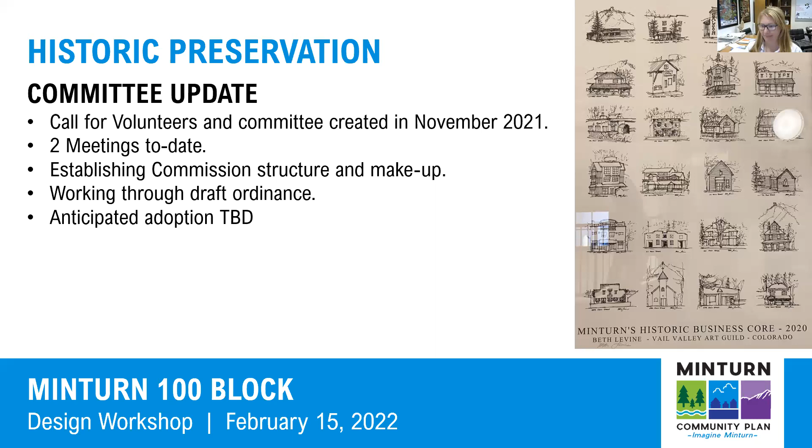And again, think 20, 30 years out, right? This is part of the community plan, which is typically a vision of 20 plus years. And so we want you to have your long-term lens on when thinking through these critical issues. We'll take a break a little over halfway through, and then we'll come back and do more of the public side, so site design and public realm aspects and parking. And then we'll end with questions and discussion.

So as I'm sure many of you are well aware, there's been a lot of activity in Minturn, just a lot of studies happening. And so the sentiment and the direction that we've got from the town is that they need real regulations in place. There's been enough studies done now that they want real direction. And so that's really what we're here for today, is to have lots of participation. We're so excited to see this many of you participating, and it means a lot to the community. And so following this workshop, we will go into drafting some regulations and design guidelines for the 100 block.

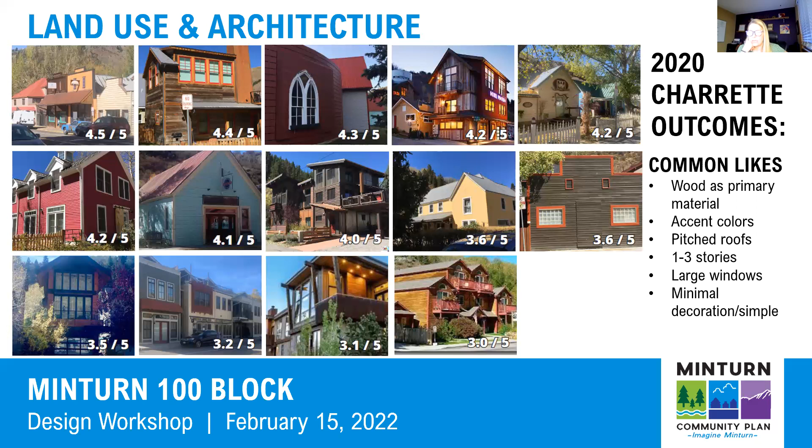So here on this slide is a picture of one of the things in the 2020 charrette that that group did, what we call a visual preference survey. And so they took a lot of photos of buildings in Minturn and they asked, how well does this building represent Minturn? And these were the results. These were the most liked by the participants of that workshop, or the ones that they thought represented Minturn the best. And so common likes, commonalities here that we see are wood as a primary material, some accent colors, pitched roofs, everything's 1 to 3 stories, large windows, and minimal decoration.

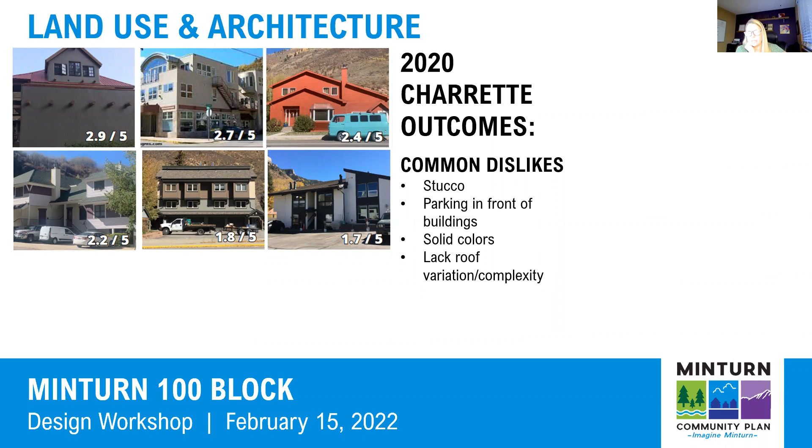So the question here, we want to pause and again see, are we on the same page? So on a scale of 1 to 5, how well do you agree with these values? 1 being strongly agree and 5 being strongly disagree. And we just want to see, of attendance tonight, do you still agree with these characteristics, these vision elements? Okay, we're at about 50%. We're at about 75% now. I'll give you all about 10 more seconds and I'll close it.

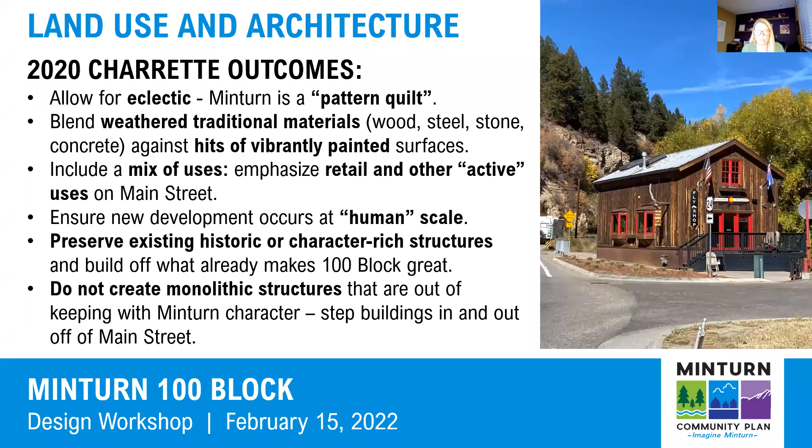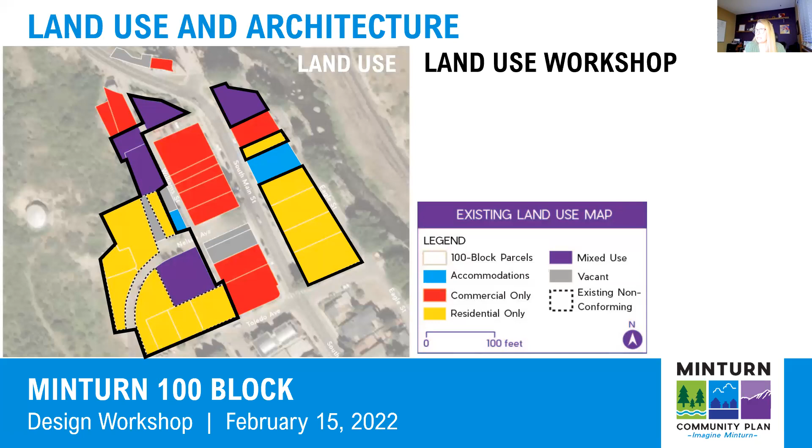And so some of the pros to this approach is that you are mandating tax revenue uses on the ground floor. So you're getting those commercial uses and the tax benefit. Active street life: by requiring commercial uses, you're hopefully getting more active uses on the street and sidewalk. The trade-off is that residential that may want to be located down in the 100 block would be pushed to other parts of town. Without much residential in a downtown, it can feel not as lively, and businesses could potentially suffer from not having those full-time residents within walking distance.

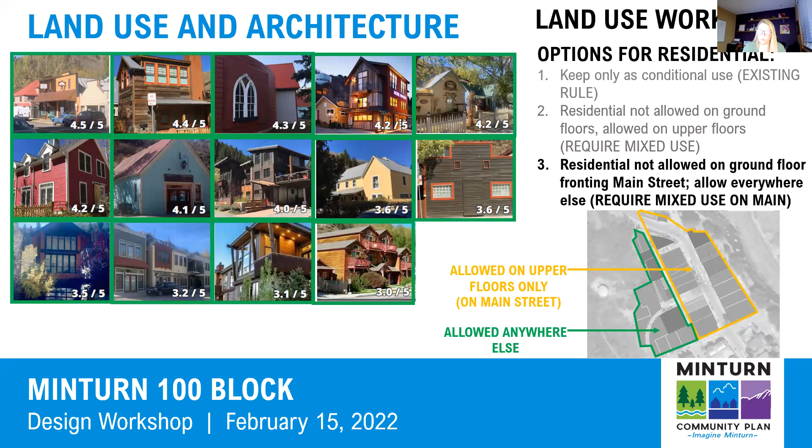And so we just want to understand what your vision is for the future of the 100 block. Do you envision future residents there? And if so, where should they be located? I want to also point out that both of these last scenarios would not preclude a full commercial structure from being built either. So we have three options here.

The first one is keep the rule as it is, where residential is a conditional use and only on the second floor. That's what the existing regulations say. The second option would be residential is not allowed on the ground floors, but allowed on upper floors everywhere in the 100 block. And the third option here on the screen is residential is not allowed on the ground floor fronting Main Street, but it is allowed everywhere else in green.

So we have another poll to enter, and take your time. I know this can be a little confusing, and hopefully we spelled it out enough for you to understand and be able to make an educated choice. We really want to understand if residential should be allowed, and if so, where.

Janie, I think we have a question that I want to make sure we have a nuanced answer to. Krista Driscoll just asked, would these options have any impact on current residential structures? And Michelle answered that current residential would be grandfathered in, but the real answer is that it would really only be grandfathered in to a certain extent. No one's going to come knock on anybody's door and say, the code changed, you can't have a single family home or residence here.

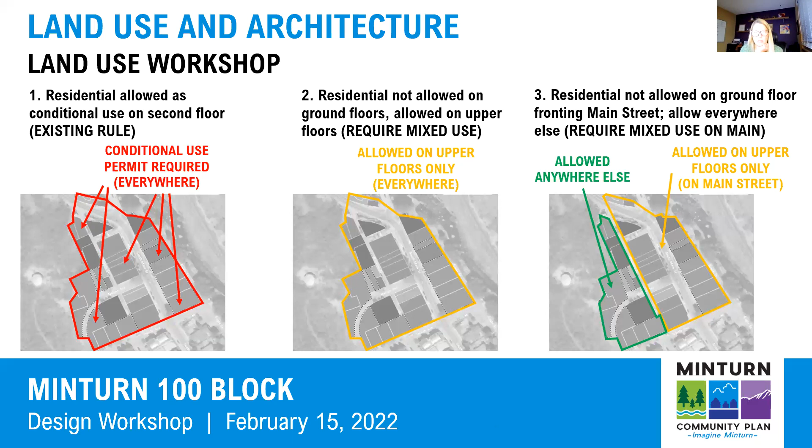Okay, so we're gonna move on now and go into building height. And so this is where we'll spend the majority of our time tonight. We're doing great on time, and I wanted to be sure that we had plenty of time to address this issue, so we should be good. This is gonna take a lot to set up. I'm gonna go through a couple slides, and then I'm gonna switch over to a 3D model of the 100 block where we can fly around and look at some different scenarios, and it should be pretty fun to see and explore.

So this map here is existing height, and so everything in yellow is a 1-story structure. Everything in blue is 1.5 to 2 stories, or 17 to 27 feet generally. And then everything in red is more of those taller 2 or 3-story structures, greater than 28 feet to the midpoint of the roof. Everything with the black dashed lines going through it is a pitched roof. So that's important to understand, that the large majority of structures in the 100 block are pitched roof structures.

And what I mean by half stories, this can be confusing, but basically this is showing a 1.5 story and this is a 2.5 story. What that means is the half story is tucked into the roof structure. So it doesn't have a full footprint of the bottom floor, but you can fit some program into that roof, so we call those half stories. So this is a 1.5 story. This would be an example of a 2.5 story that you might have some program up there.

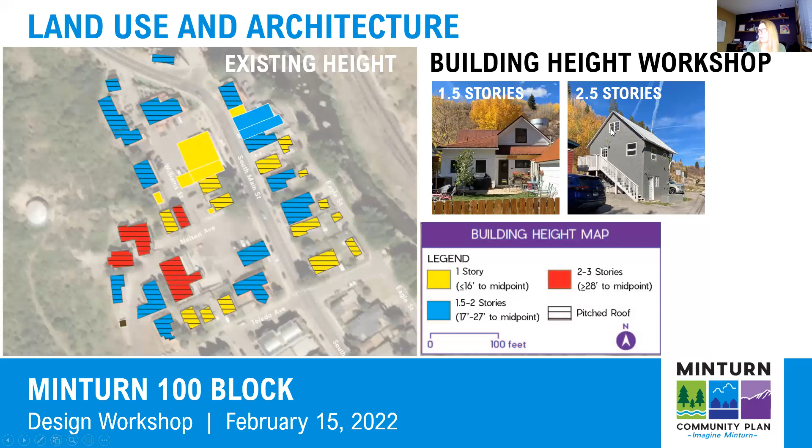Let's see, next slide. So this is what the allowed height is under existing code. Everything in blue, so every property that touches Main Street, has a 28-foot height limit. That is 28 feet to the maximum point for a flat roof. But for a pitched roof, height is measured to the midpoint of that roof, from the point to the very top. So this is what we mean by that half structure. 28 feet is a little low for a 2.5 story building, but it's not impossible. But if you're doing a flat roof, you only get the maximum of 28.

The thing that I think this way of measuring the height does is it incentivizes pitched roofs, because you can go a little bit taller. Whether that is desired to continue or not, I'm not sure. We'll work through that. But just wanted you to understand how that height is measured.

On the red, so everything kind of west of Williams and along Nelson is allowed to go up to 35 feet under existing regulations. That's typically more of a 3-story structure. Perhaps a 3.5 story, you might get some program up there. If it's a residential only use, so if you do go through the conditional use permit, it has to follow residential standards, and then it falls back down to 28 feet. So it can be confusing, but under existing rules by right, you can't do residential. So we wanted to show, this really is the by right scenario. If you're going to build a building in that red zone, you can go to 35 feet.

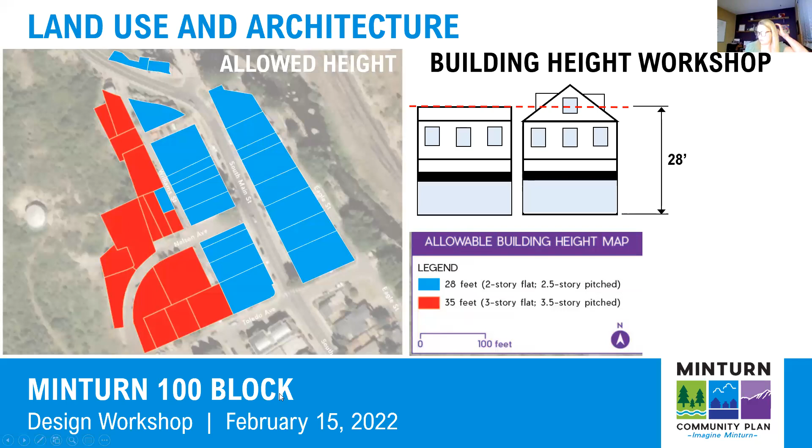Okay, so we're going to transition into a SketchUp model, and just somebody nod your head or verbally tell me, can you now see my other screen? Yes. Okay, awesome. Okay, so we are going to fly through the 100 block and look at a few different scenarios. I'm going to set this up and go through this in order. We're gonna look at some conditions along Main Street. We're going to look at some conditions along Williams Street and some along Eagle River.

I wanted to start here kind of in plan view. You can see the area of downtown. You can see building footprints, where parking is, the road, Main Street coming through. Here's the river, just to orient you, and north is up. So when we talk about heights, and especially in these quaint mountain communities, sun access is important. So I just want to show everyone, I'll turn on shadows here.

We're looking at equinox. So this is an average sun condition. Of course, in the winter, it'll be a little bit shadier because the sun is lower. In the summer, it will be a better case scenario, less shade from buildings because the sun is higher. So we're looking at an average condition.

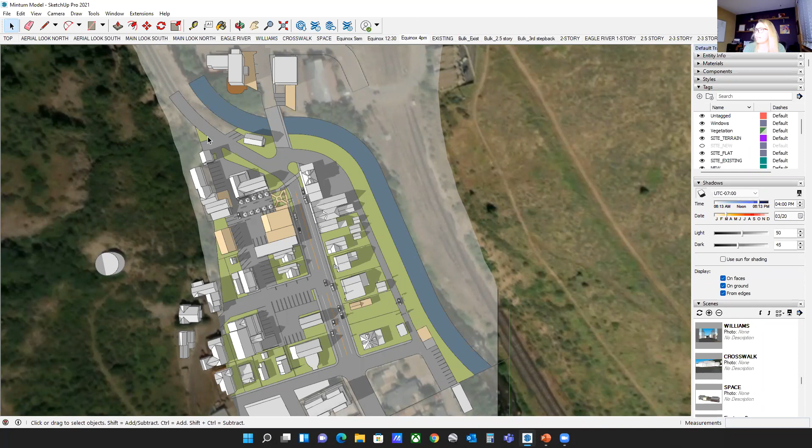Okay, so we're just gonna fly around, as I said here. I want to start by looking at this aerial view. You can see I've picked 3 sites in beige that are going to be our test sites for today. And we're going to look at some different scenarios for, if those properties did redevelop under existing regulations, this is what could be built. And then we'll look at some options.

Just full disclosure, these are for testing purposes only. I haven't consulted the property owners. I'm not working for them. I'm not a developer. These are simply to test different scenarios of a couple different Main Street fronting properties. One that would go to Williams Street here, so Minturn Country Club. One that would go from Main Street to Eagle River. And then one along Williams, because they have different rules.

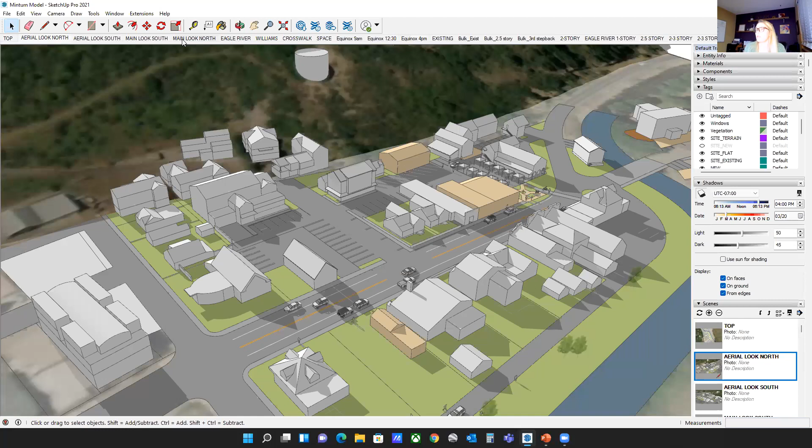So first, we're going to go over here to Minturn Country Club and look at pedestrian level. So this is standing on the street. This is what the massing looks like today. So it's a 1-story structure, maybe 16 to 18 feet tall. And you'll notice that these properties on the northern side of Main Street are a little different in that they come all the way up to the sidewalk. So you can see those buildings, and I'm sure you are aware there's a pretty tight sidewalk space to walk there. But they do feel a little different than the further you get down to the south.

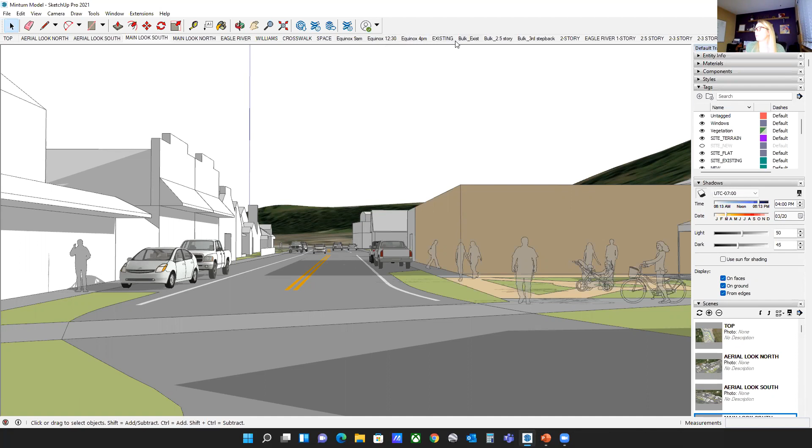So let me look here. This is the current sort of regulations. This is the imaginary box that if you were to redevelop, this is what you could build to today. So this is showing that 28-foot height limit. So this is the maximum 28 feet. If you are a flat roof structure, you can just put that box there.

If it's a pitched roof, there is a bulk plane that sets in. And then again, there is that rule that the 28-foot height is measured to the midpoint of the roof. So you could actually go a little bit taller if you are a pitched roof structure. But generally, this is that imaginary box that those regulations set. So you can kind of feel what that feels like.

I'm just going to walk through a couple other scenarios. So 28 feet is a decent 2-story structure in a condition like this, in a more urban condition of a downtown.

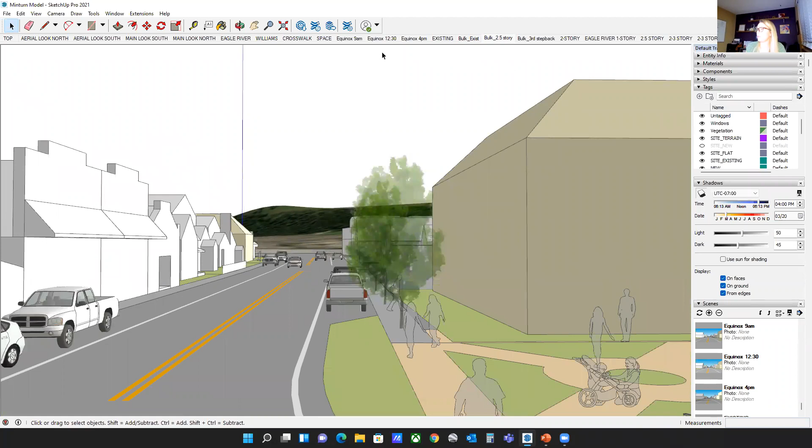Another way to do that is to use the bulk plane, but do it on all sides. So this is just showing you a different scenario of that imaginary box. So you might set a max dimension and then have the bulk plane go up from there. This raises that dimension, instead of 20 feet, which is more of a 1-story before the bulk plane sets in, this would be allowing more of a 2-story frontage, which is what these feel like.

And bulk planes can be a little interesting to administer. They're used a lot in zoning codes, so they certainly are not new. They're meant to kind of step back the massing and allow sun access in. But just showing some other ways that can be done is looking at massing and setting some different dimensions for this scenario.

Maybe there's a scenario where on Main Street you allow a certain dimension to be closer to the street, whereas a certain dimension has to be further back to allow for those patio spaces. We'll talk through this. Should buildings, new construction, be able to go up to 3 stories or not on Main Street? We'll walk through those scenarios, but if so, maybe it should be set back up there.

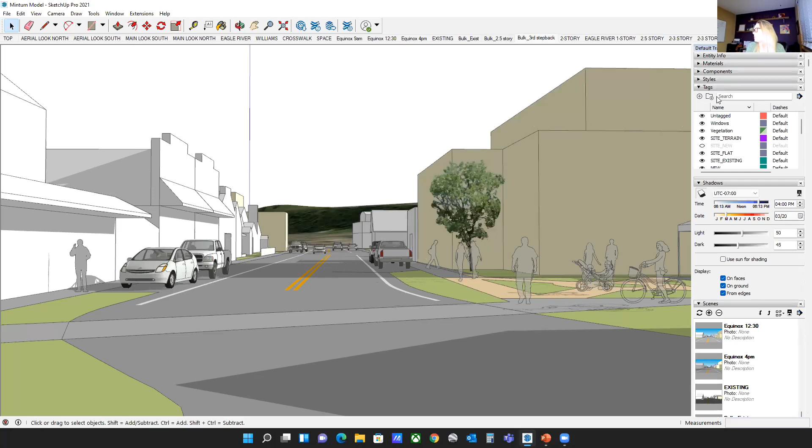You can see from different views. Turn off the shadows here for a second. If I move the camera up a little bit, we want to make sure that, even if you do step that back, it still feels like a 2-story structure on Main Street. So I just wanted to present some of these imaginary boxes. This is essentially the dimensions that will go into a code. But I know that can be hard to imagine in your mind.

So I'm going to offer some architecture. I ask you to keep an open mind. I did not design these buildings. You might not like the style, but really just pay attention to the scale that they provide. So back to existing conditions. This is the existing bulk plane and allowance today. And what that might translate to, we can look at this condition where it's a typical 2-story Main Street traditional storefront building. So that could be built under today's regulations.

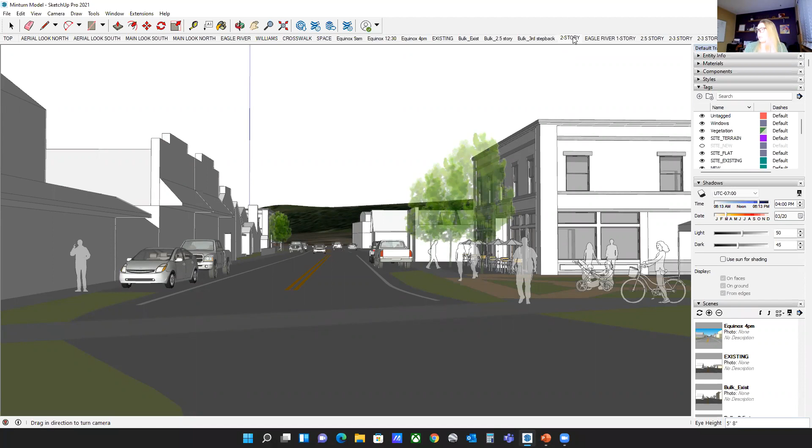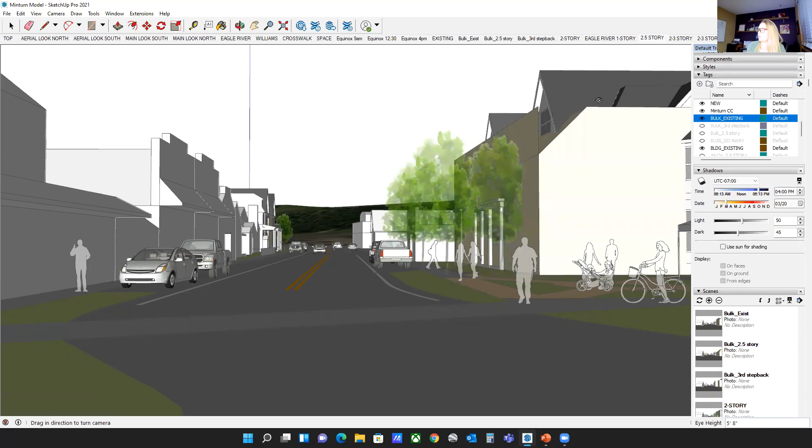Another option is a 2.5 story. So how does this feel compared to that 2-story building? Is this something that might be appropriate in downtown, having that 1/2 story tucked into the roof? So with the existing bulk plane, I can turn that on top of this. This could almost be built. You can see that bulk plane would make that top gable go back further. But again, these are the things that we want to test and then reverse engineer what's appropriate. So I do want to present something like this to see how people react to it.

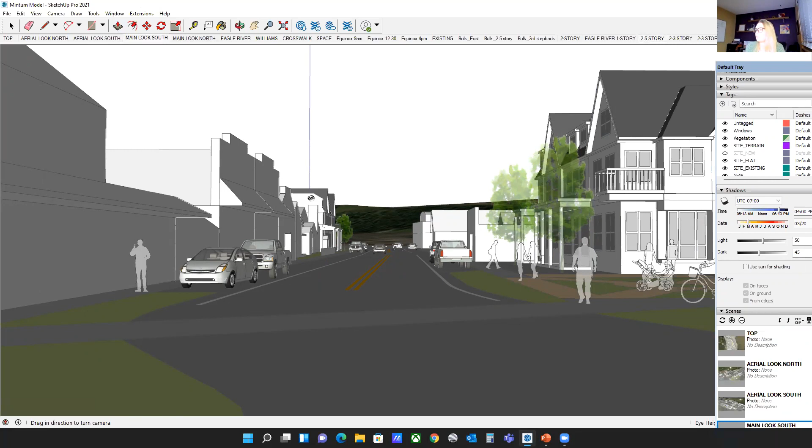There might be another option where, so this is that 2.5 story. Another option would be a 2-story in front where perhaps it could go back to 3 stories along Williams. And so again, these are just some massing models that show architecture. Don't get too attached to the style. Not particularly in love with this one either, but could there be a scenario where there's 2 stories required in front, but it allows for the 3 stories in the rear, kind of the back half of the site?

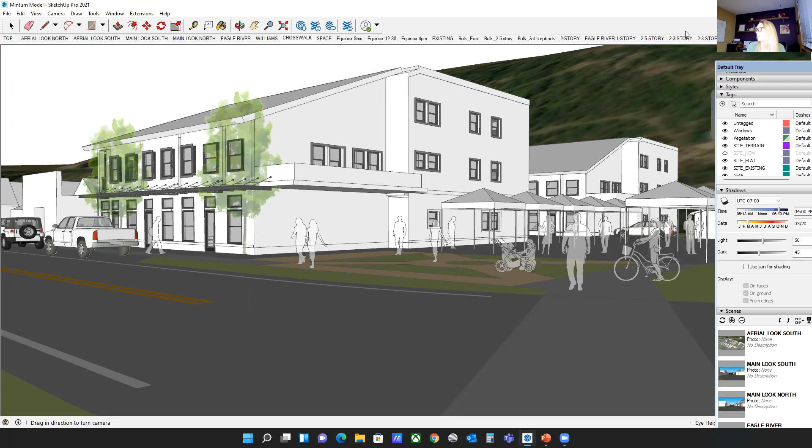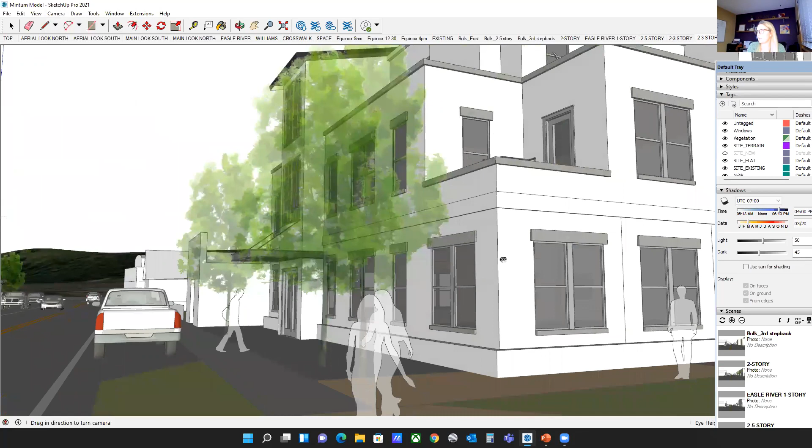Going back to this view where we want to compare. Another scenario might be more of that varied massing. So still regulating that 2-story feeling along Main Street, but allowing a 3rd floor more in a penthouse style that would be required to be stepped back. So that, from the street, let me place my person. From the street, if you're looking around, it feels like a 1- and 2-story building. You would have to look up to see that 3rd story.

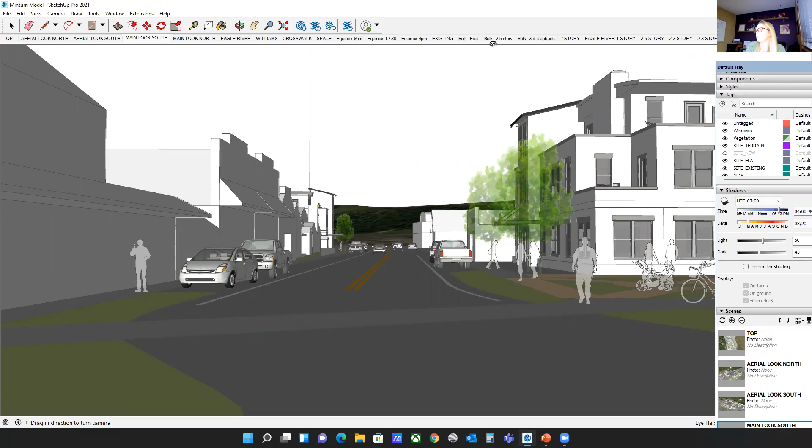So these are some options we're going to look at. We are going to go back and vote on them, but I just want to fly around and show everyone these different scenarios just to give you an idea of scale and massing, so that we can reverse engineer into some of the better regulations for the town. So this is sort of that gateway area at the corner as you enter Main Street there. Let's go now to look from the other side of Main Street.

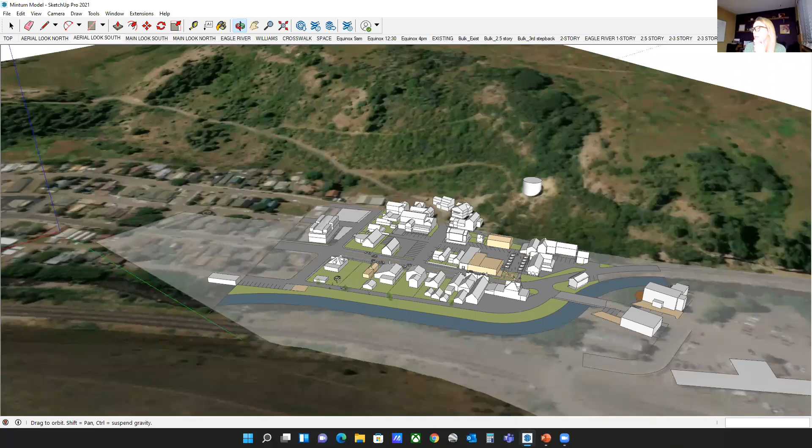So this is. Shani, can you pause to take a live question? I didn't know the answer to it. Yeah. There was a question about the shadowing in the model, were you able to take into account the topography of the hillsides where often the sun goes down behind those hills fairly early in the afternoon? Yes. So you can see, we do have the hillside modeled. Okay. So the topography is there, and so it does cast shadows appropriately. Great, thank you.

Okay, so we're gonna go to Main Street looking north. So this is existing conditions. This is that little shotgun house there today. So you can kind of see how these buildings feel today. And instead of going through the bulk planes, because we've already explained how that can all be regulated, we might look at bulk planes, we might look at step backs, we'll play around with the appropriate dimensions, but we really want to get gut reaction to what's appropriate on the street.

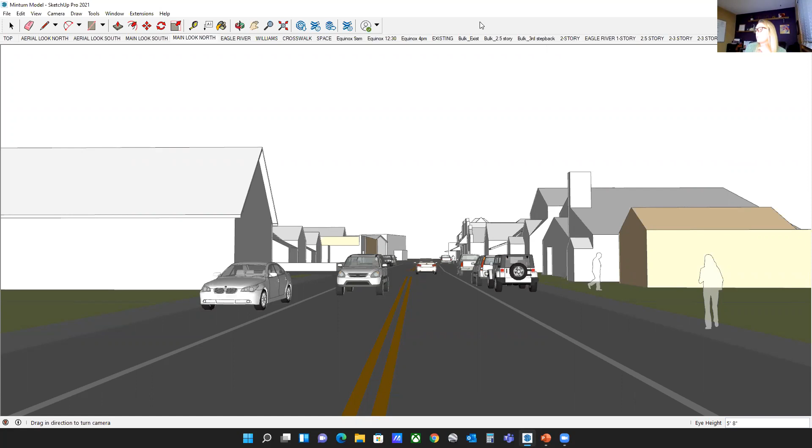So this is sort of a different condition. More of the residential structures here. So these buildings are set back from Main Street a little bit. And so let's just look at that 2-story condition. So this is sort of modeling what that same 2-story storefront might look like in the existing conditions today.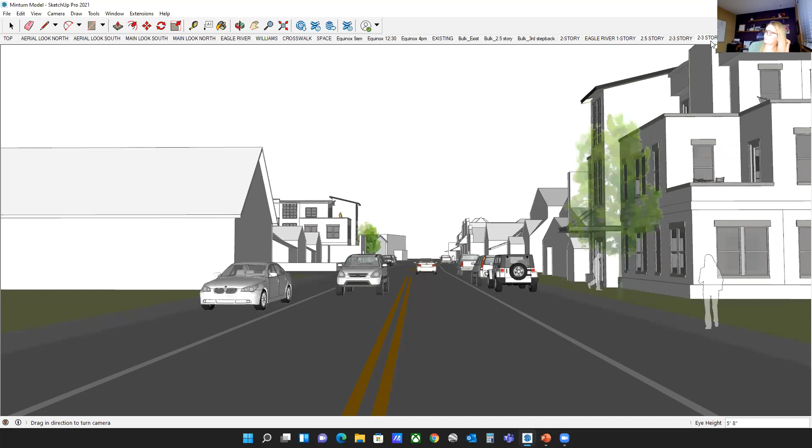Flat roof, just showing maybe a 2-story with a pitched roof. Here's that 2.5-story. And then finally that 2-story in front with a 3rd floor step back. And then the one that I actually forgot to look at is we also want to present a full 3-story option, just in the event that that is popular. This is what that scale would look like here.

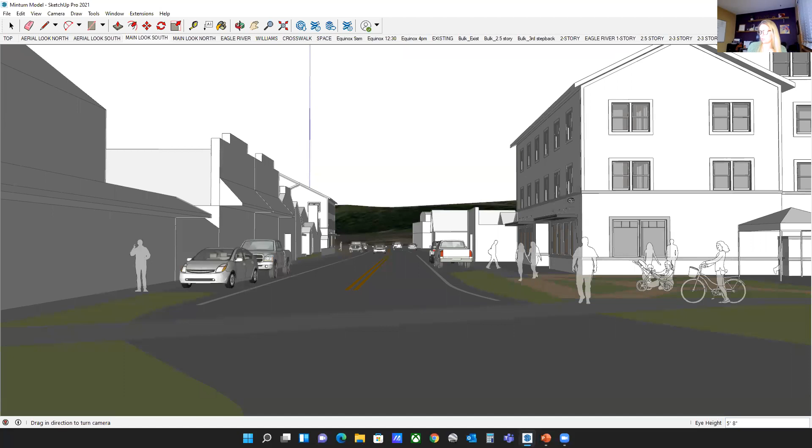And since I missed doing that on the other one, let me go back there and show you what full 3 stories would look like in existing condition context. So those are the scenarios for Main Street, what we're calling Main Street South. So I'll go through those one more time.

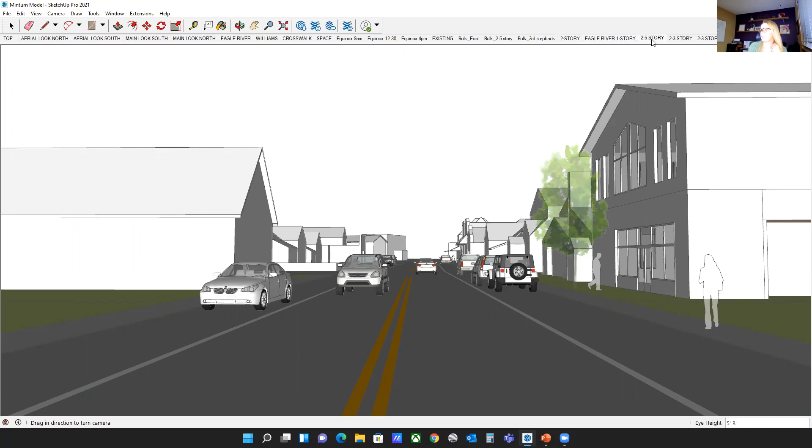Really allowing a maximum of 28 feet in that 2-story envelope, period. Maybe allowing for that extra height if it's a pitched roof, like the existing regulation says. Is there perhaps a desire to allow that half-story up there, or looking at the more 2- and 3-story massing and what that feels like. So again, we'll go back and look. I'll have pictures of these that you can remember and recall, and we can always go back to the model if we need to. So that's Main Street.

We wanted to look at that sort of northern segment condition as well as the southern segment condition, because they do feel a little bit different today. And so we want to think about those different contexts in terms of when we get into writing the regulation, should they be the same all along Main Street, or should they maybe differ? And so that's what the voting will tell us.

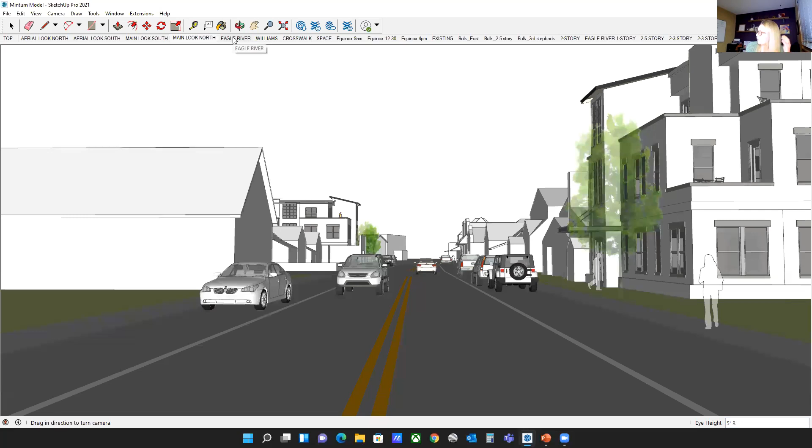While we're on this property, I'm going to go back to existing conditions and look at this property along Eagle River. So this is Riverside here in the green space, the one-way drive headed south, and you can kind of see the existing, these are all the more residential scale structures that line that area today.

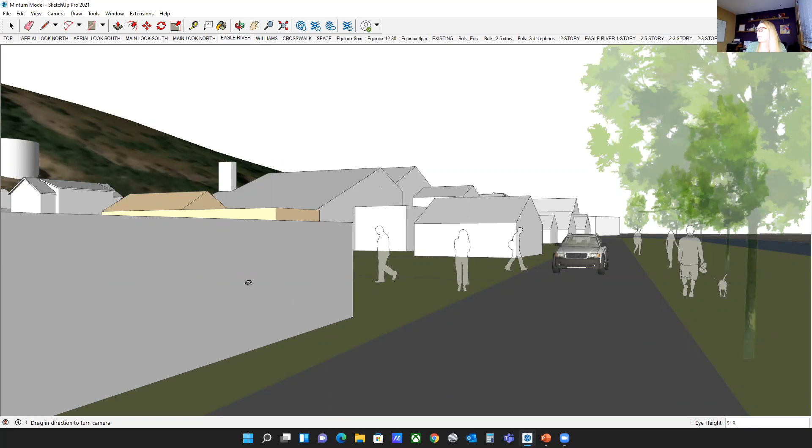Under existing regulations, this is that 28-foot box. And so turning that into architecture, this is sort of what could be built under existing regulations. Again, kind of that more 2-story structure there. We're going to present a couple options here. Again, just for mass and scale, looking at a 2.5-story structure and what that feels like along the street with these other structures.

Or perhaps I also wanted to present just another option here, knowing that the context is more of a 1-story atmosphere. So another option would be to look at some sort of regulation that says buildings can step up to 2 stories here, or 3 stories, but you really want to try to keep that 1-story frontage along Eagle River. If that's desired, that is something that could be written into the code.

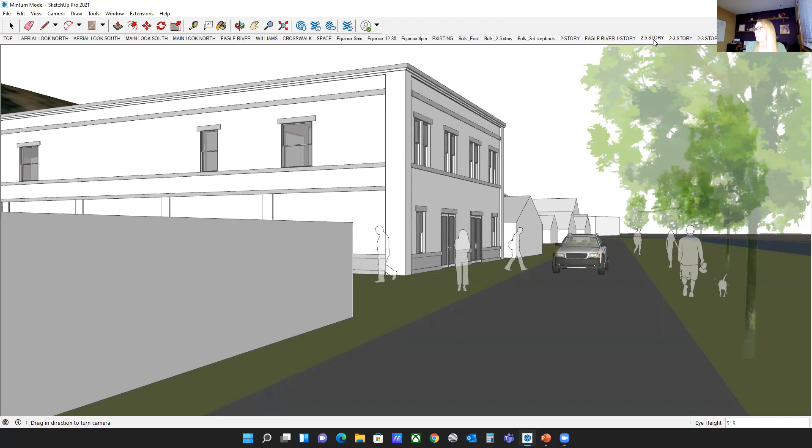So again, I'll go through those. This is massing that would be allowed. This would be almost allowed. It's a little too tall to fit in the box that you have today, or that 1 to 2 story step back. The other thing that this could do, which is cool, is provide maybe some roof decks overlooking the river.

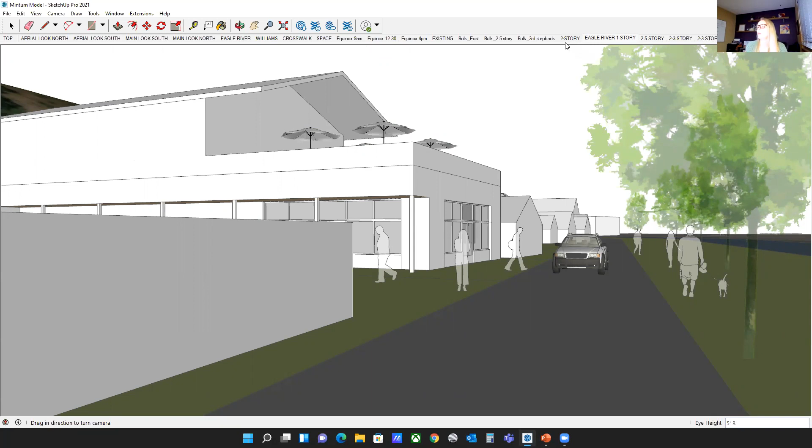Okay, moving along to our last condition here is Williams Street. So this is looking south along Williams. So you're coming in, it's a one-way going south. This is Hotel Minturn back here. This is a 2-story apartment structure. And we have some tents shown here for the Minturn market.

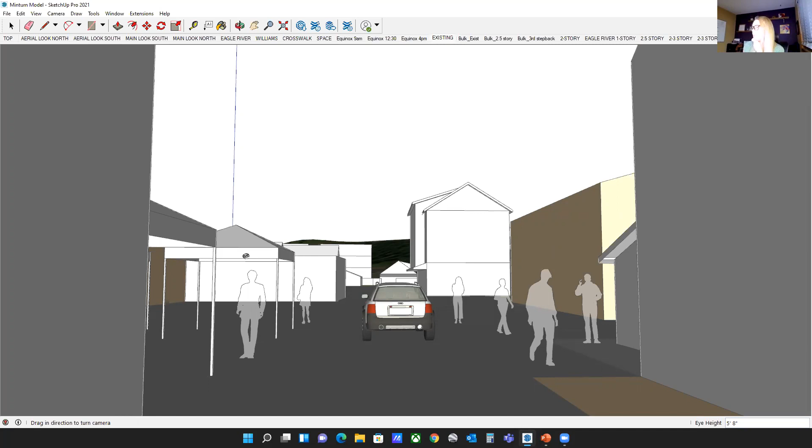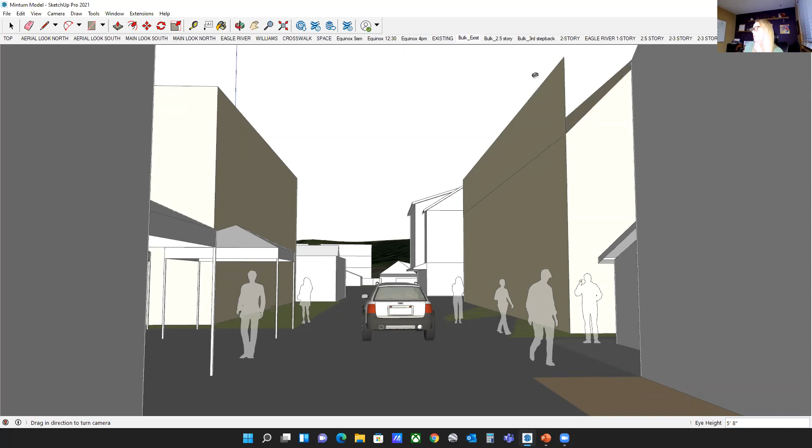So here, let's look at just showing existing bulk. Again, that 28-foot plane. If it's pitched, you can go up to that 35-foot dimension though. So it goes up a little bit higher, but the bulk plane still starts at 20. So it's a bit of a higher pitch. So again, let's just look at these conditions. So here is a 2-story condition and what that would feel like on Williams Street.

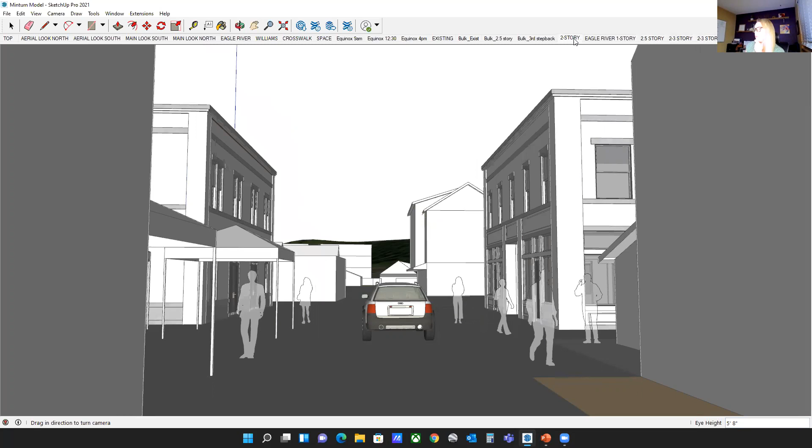Here's that 2.5-story condition along Williams. Skip that one. And then here is the 2 to 3-story massing and what that would feel like. And I think we did, yeah, full 3 stories. So 2-story enclosure, 2.5-story enclosure, and then that 2 to 3-story enclosure.

So again, we can flip through these, but these are the conditions that we want to get your votes on tonight. It's really important to look at these three conditions along Main Street, both north and south, along Williams, because in the 2020 charrette, it was expressed that people would really like to see more activity on Williams and have it be this cool pedestrian shared street with more active uses. And it's starting to get that with some of the uses happening back here today.

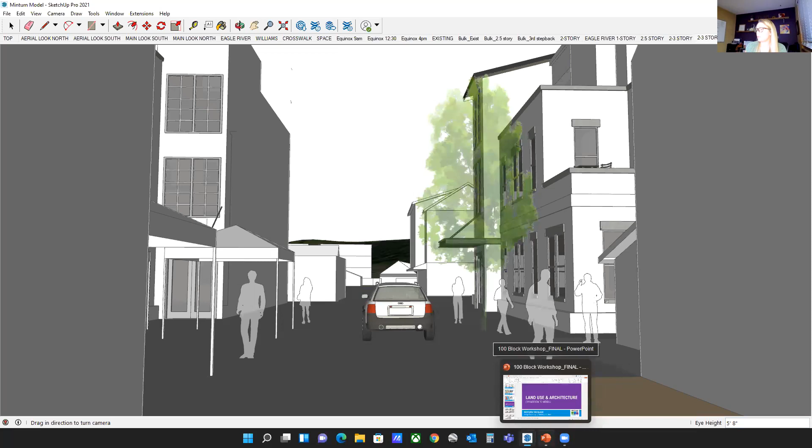Okay. So our first poll is looking at Main Street North. This is the first area that we went to, at the Minturn Country Club example. So we want to ask you to vote on these scenarios. Number 1 would say 2-story and 28 feet max. Draw a box and don't incentivize pitched roofs. Just put everything within that 28-foot box. It offers predictability, but it would be 2-story maximum.

Option 2 would be a slight modification of that. It would be sort of what you have today, but maybe playing with the dimensions to make more sense architecturally. So 2-story and 28 feet would be max for flat roofs, but pitched roofs might be able to go up to that 2.5-story typology that we showed. This would incentivize pitched roofs by allowing that extra height.

Option 3 would be 2-story max along Main Street, but in the back half of the site, you could go up to 3 stories along Williams. So you would step back that 3rd floor from Main Street quite a distance, at least 20 to 25 feet. Option 4 is looking at allowing up to 3 stories, but requiring that 3rd story to be stepped back on all sides. So instead of just stepping back on Main Street, even on the sides and along Williams, you would step back that third floor.

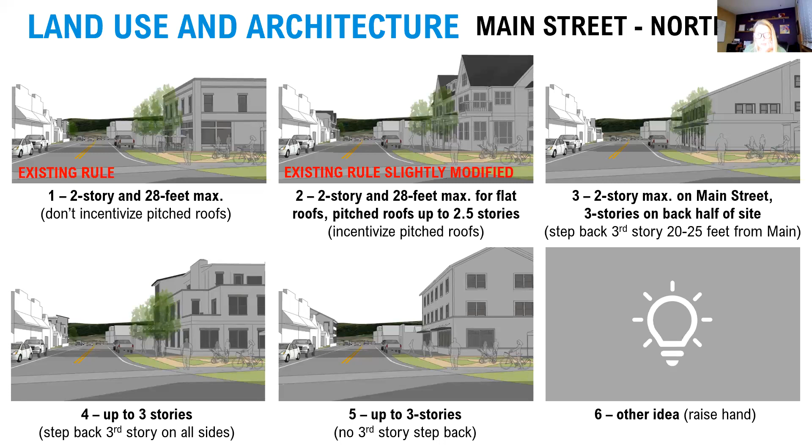Okay, let's move on. I'm going to change to the options for Main Street South, and so we just want to understand your vote might be the exact same. You might think that Main Street is Main Street and just make the rules the same. But in the event that you feel a little bit differently about South, just because the existing patterns are a little different, we want to know that.

So the options presented here on the screen are similar to the first one. Option 1 being just make that 28-foot box. Everything has to fit into it. Option 2 being 2-story and 28 max for a flat roof, but allow a little bit taller for pitched roofs to incentivize pitched roofs. Number 3 being allow up to 3 stories, but step back that third story on all sides. Or number 4, just allow up to 3 stories, or 5, other idea, raise your hand. So the gentleman that mentioned the 3 stories along Eagle River, that would be option 5.

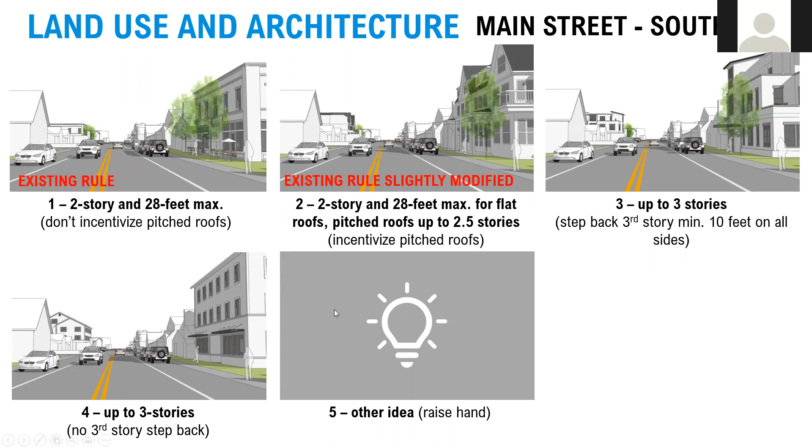So, Ken? Okay, great. So we've heard, let's ask, I'll ask you to unmute someone that we haven't heard from. So we've talked about the 3 stories there. We've talked about the parking concerns. Anyone have any other ideas for Eagle River that you want? I just want to make sure that everyone can be heard. So right now, the people with their hands raised, we have heard from before. If anybody else has anything, please feel free to raise your hand.

Okay, let me ask this another way. If your comment has already been touched on, if you could unraise your hand so that we can stay on time. If you have a brand new comment that hasn't been brought up, you can keep your hand raised and we will unmute you real quick. Also, you can always use the Q&A. So if you have a follow-up comment or a question to clarify, please pop it in there. Krista, you have the ability to unmute yourself.

So one of the things we love best about Minturn is that the river goes through it. We're definitely river people. I think that if you go too high back there, then you're kind of limiting that view or even what you can see of the river to people who can afford expensive redevelopment on that side of town. Okay. Ken?

Hi, can you hear me? Yes. Regarding the riverfront, I think it's an untapped resource. I always thought that we could have food truck Fridays there all summer. We have to get people over there. I'm not commenting on the height that should be over there, but we need to utilize that space. Al fresco dining in the evenings all summer long, food trucks. I think we can really revitalize the town using the riverfront, like many other towns have done. Thank you. Okay, Kelly?

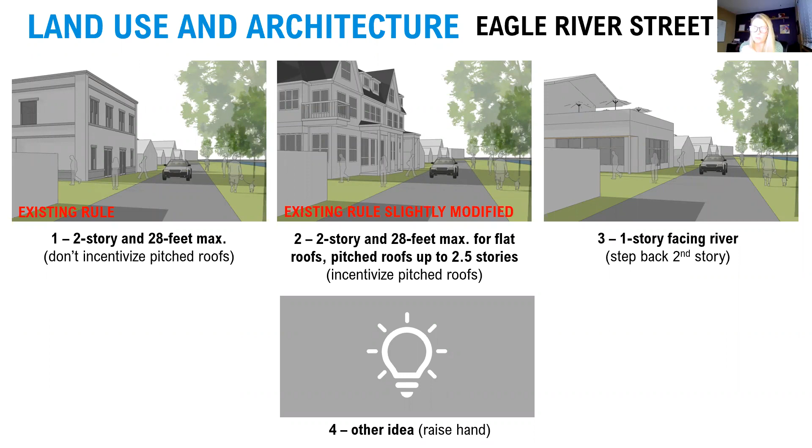Okay, we're at 56%. Scott, do you want to answer the food truck question while people are answering the poll? Sure. Good evening, everybody. The town just adopted food truck regulations this last year. So the question was, are there any restrictions in place that limits that? And there are. So good question. Thank you. Okay. Have about 82% participation. I'll give everybody about 10 more seconds.

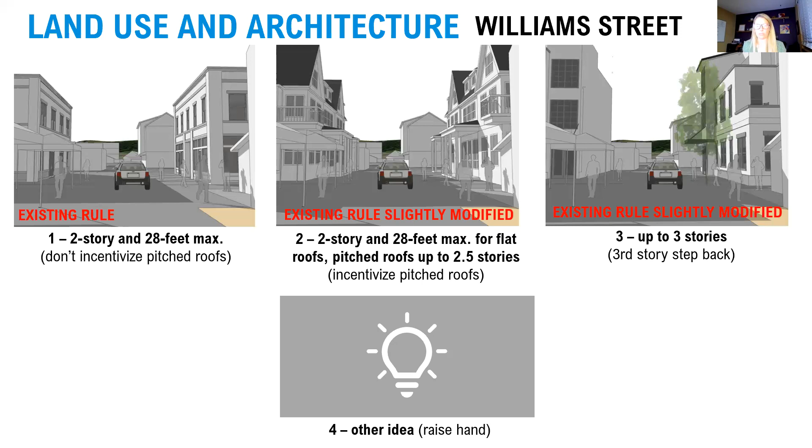Thank you, Madison. Okay, so the next 45 minutes, we're going to go through site design aspects of regulations. So talking about setbacks and lot coverage, more fun stuff, and then parking, the really fun stuff last. So stay with us hopefully for another 45 minutes, and then we'll get you out of here on time. For site design, I'm going to hand it off to my colleague Ellie, who's going to walk us through some of the site design stuff. So Ellie.

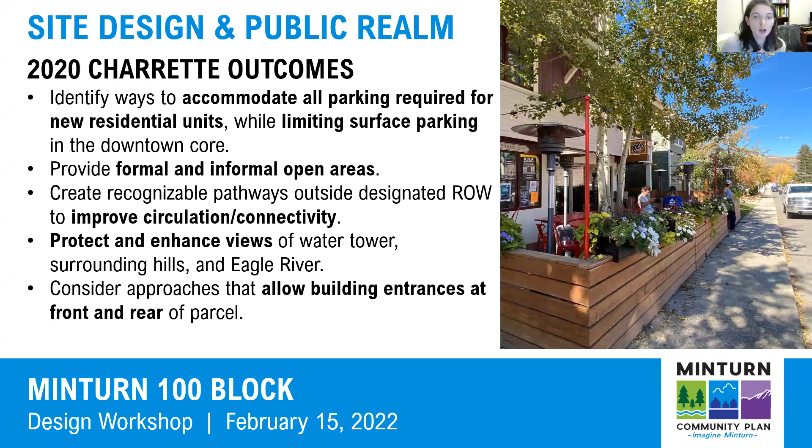Great, thanks, Janie. Do you want to start sharing your screen? Or do you want me to share? Nope, I thought I did. Thank you. Okay. Can you see the screen now? Yes. Okay. Weird, it's not showing. Oh, there we go. Oh, apparently my internet connection's unstable. That's great.

Next slide. And these were some of the other outcomes we heard. This has been talked about already a little bit tonight: having more connections to the river, having buildings that go in and out along Main Street, so not having one set setback but having some variation in the facades there. And then creating more opportunities for landscaping, courtyards, and cafe seating, so figuring out where some of those green spaces can come in.

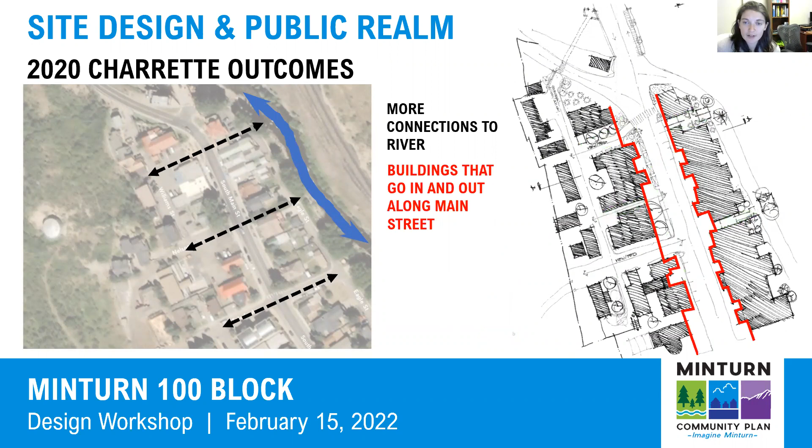And so now there'll be a poll that asks you for your level of agreement with what you just heard. If you fully agree, it'll be 1, and don't agree is 5. And if there are some things you want to provide comments on related to that, please either raise your hand or we can start with putting them into the Q&A and see where we go based on the poll results.

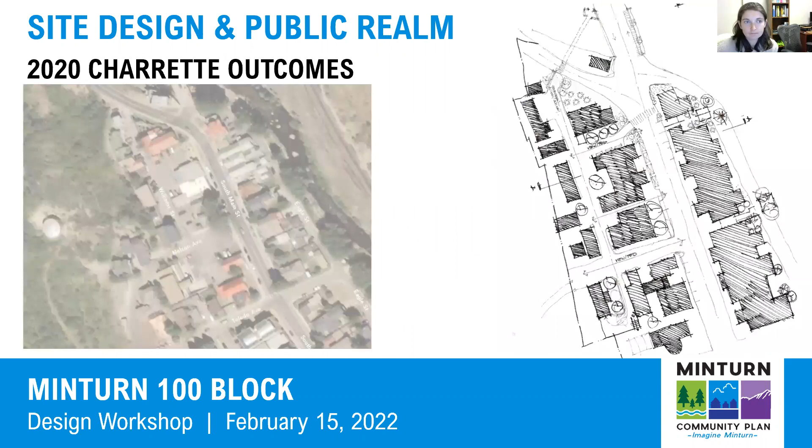Okay, so now we're going to be looking at existing site design and how buildings are laid out relative to what's actually allowed. And then we can figure out how do we work with that. So in terms of lot size, the minimum in the 100 block is 2,500 square feet. The maximum is 7,500 square feet. So what does that mean? That means that if you have a lot that is smaller than 2,500 square feet, to redevelop it you would need to put multiple lots together. And if it's more than 7,500 square feet, you would need to divide it.

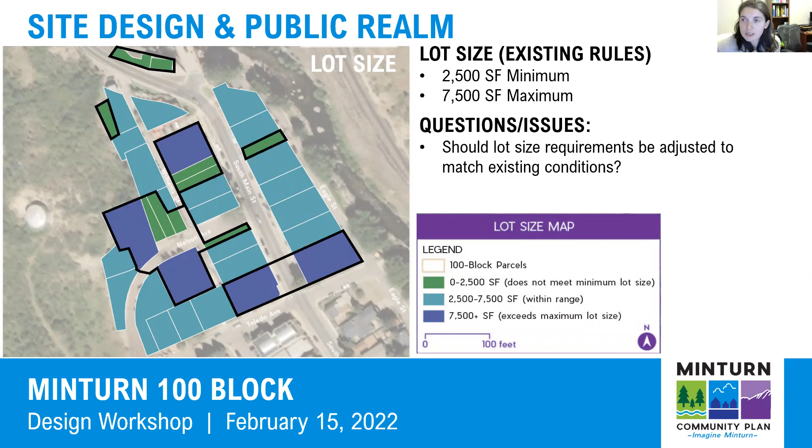And so these areas that Cheney is marking in that black line are those lots in the green or dark blue. And this analysis isn't perfect. This is based on GIS data, but it gives us a relative sense. Do we have a poll on this one? No, we don't. Okay. So we'll just move on to the next one, but if you have any comments about that, please put them into the Q&A.

So required setbacks. For any lot in the 100 block, you're required to have 10 feet from the front, so that's from the parcel line, 5 feet on either side, and then 30 feet from live streams. So as you can see, there's a lot of buildings that are coming against that. That dark gray area is really the allowable building footprint based on those setbacks. And so some of those areas outlined in red are where buildings are not in keeping with that. Prime examples of that are the buildings that go right up to the sidewalk, or the buildings that are next to each other. And we see a lot of those in that northern portion of the 100 block.

And so the poll question we have here is, Cheney has drawn this black line of where we see a lot of that existing, and how should we differentiate or not differentiate in terms of what's allowed. So potentially making changes to allow buildings to come up to the sidewalk, or to not have any space between them. So the question is, should setbacks north of Nelson in that black outlined area be allowed to be smaller given the existing context of buildings that are closer together? You can answer yes, properties north of Nelson should be allowed to be closer together, or no, all properties should be treated equally.

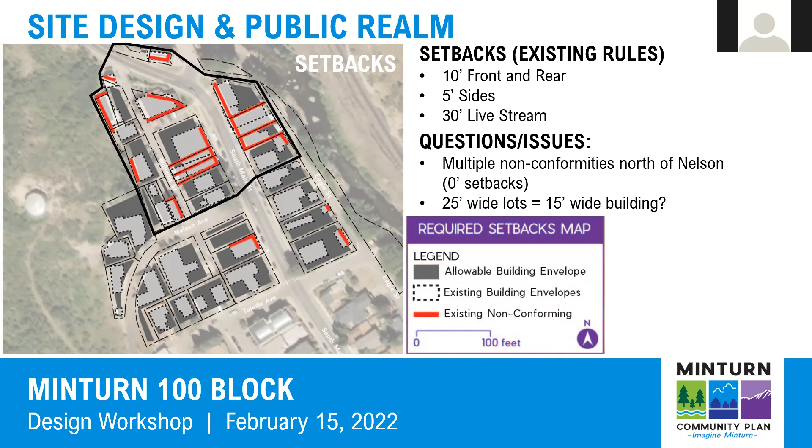Great. So the next element we're going to talk about is lot coverage. Right now, what's allowed in the 100 block is up to 80% lot coverage. There's only 2 parcels where that is occurring, these 2 that are in the dark. And there's actually a fair bit of variability, as you can see by all the different shades of pink we have here. But similar to the last question, we want to ask, for this area north of Nelson, does it make sense to allow a higher lot coverage there and a lower lot coverage elsewhere? And we're not necessarily sticking to this 80% that exists now, but just thinking about the areas and whether they should be different or the same from each other.

Okay, we're at about 75%. Close it in about 15 seconds. Okay. This one was a little bit closer. 56% of people said that north of Nelson should be allowed to have more, while 44% of people said that all properties should be treated equally.

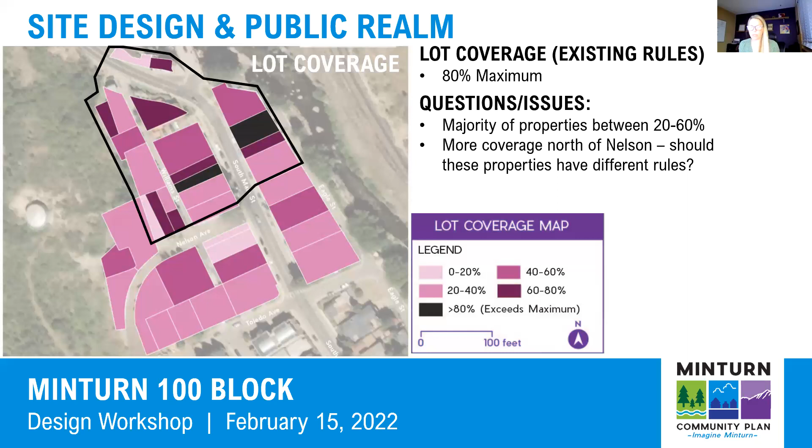Okay. So we are at 7:30. We're making up a little bit of time. We're going to move on to the parking discussion. And this will be the last setup and walkthrough in terms of a topic that we'll talk about. This has been brought up a few times tonight, and you're right that we can't be remiss and talk about development without talking about parking.

It's important to note as part of the community plan update that we are conducting a parking study. That's ongoing or soon wrapping up, and we will have the results of that to inform future parking regulations. But in terms of looking at the code and any parking regulations for the 100 block, the 100 block is treated like everywhere else in town. Most codes and parking requirements are written for new development, typically thinking about larger sites and not necessarily infill development on historic sites.

We know that absolutely there is a parking demand for the 100 block because that's the majority of businesses, but those are temporary cars, right? People come into town, they park to go to the businesses, and then they leave town. When we're talking about residential, if and how and where residential is allowed in the future, that's a little bit different story. People living in the mountains typically drive a car. So we want to acknowledge that this is a historic context. These are historic sites that were built before parking requirements were even mandated. And so being able to respond to the changing conditions over time is important.

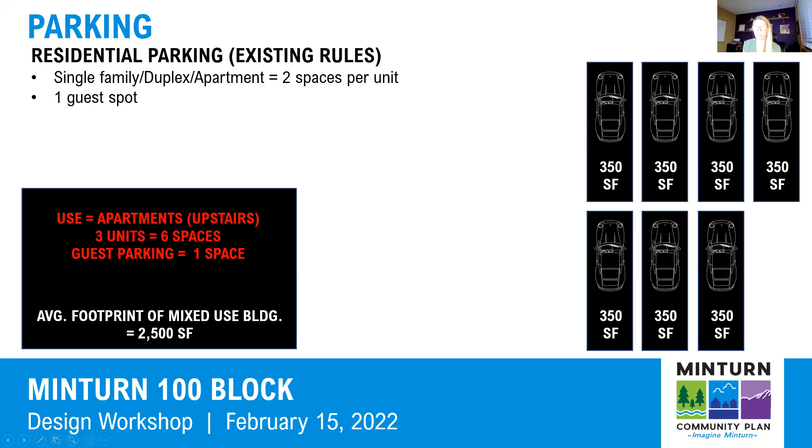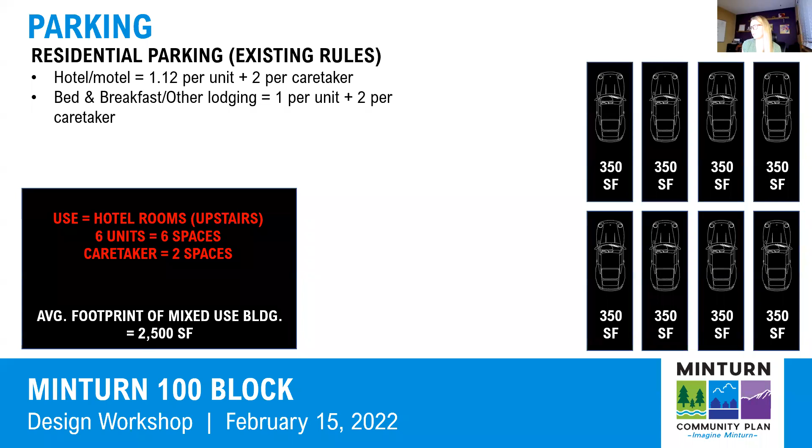If we look at maybe a lodging use, hotel rooms, they're a bit smaller, maybe we can get 6 hotel rooms up there. Per your existing code, that's 1 space per unit with 2 spaces for a caretaker, so a total of 8 spaces, so it's a little bit more.

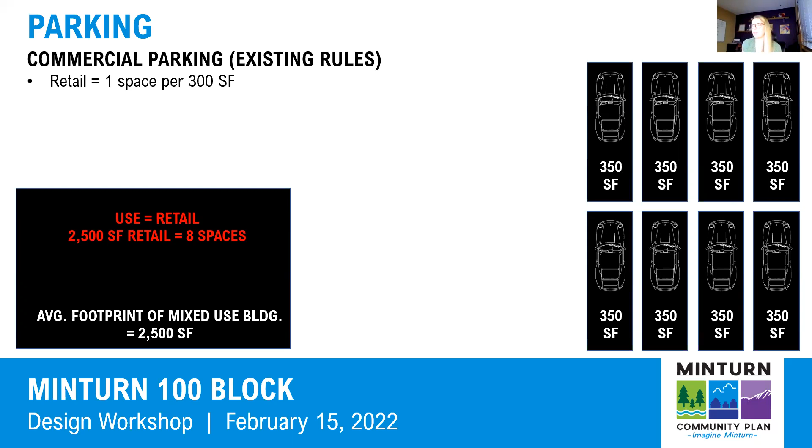And same for retail. So these are spaces that have customers in and out through the day, and there's not necessarily a big parking demand, but per your existing code, if this box were all retail, you would need to provide 8 spaces of parking. So you can start to see how the amount of space for parking is equal to the amount of space program-wise, and how you can imagine that not a lot could ever be built on these tiny lots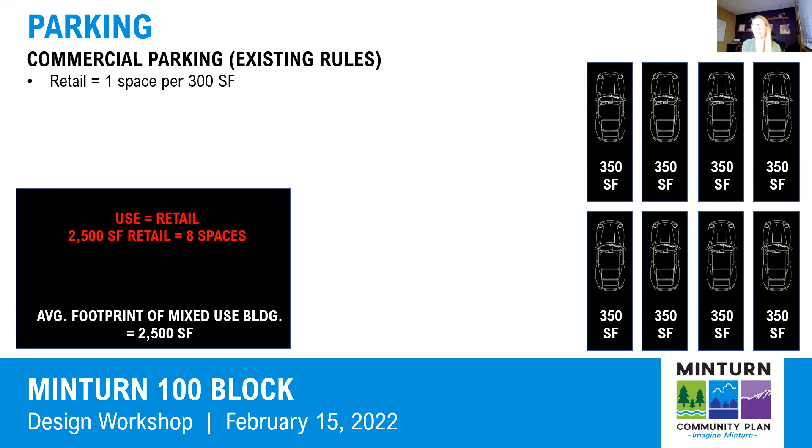because of the parking requirements. The last use, which is pretty eye-opening, is if the use were a restaurant. Now 2,500 square feet is a huge restaurant, especially for Minturn, but just so that we can compare apples to apples here, let's assume that a restaurant goes in here. Your current code says you need 1 parking space per 6 dining seats, which if we convert that to square footage, it would equal 48 spaces.

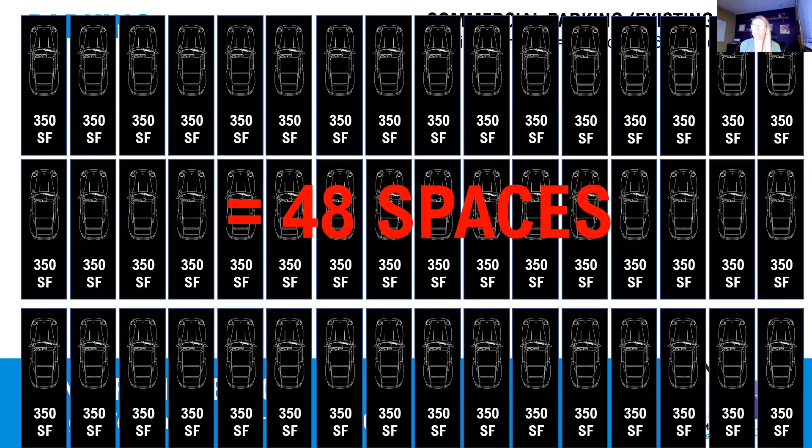So this is just an exercise to put into your minds the amount of space that parking requirements take up. And I'm not saying that they're not important to have, but I will say that they are quite onerous for a downtown, especially a historic downtown. So what can we do about it? We're going to go through just a few more slides here.

So what can we write into the future code to deal with parking, not ignore it, but also not be so onerous. So here's a list of options to explore. We could continue to require residential and lodging to be parked to code or with slight modifications, acknowledging that residents or guests who stay overnight long periods of time will have a car. You could reduce required parking ratios for commercial uses, looking at similar peer communities; we'll do some research. But this is to incentivize what you want to see.

So I think the #1 priority, right, was commercial retail entertainment uses, shopping and dining. Well, if you want to see more of that, you have to address parking requirements because it can't really be done under your existing code.

Some communities have switched to parking maximums. So instead of setting a minimum requirement, like this site has to have at least this many spaces, you could let the market decide and let each individual lot determine how many parking spaces they think they need, and the rest could utilize public parking.

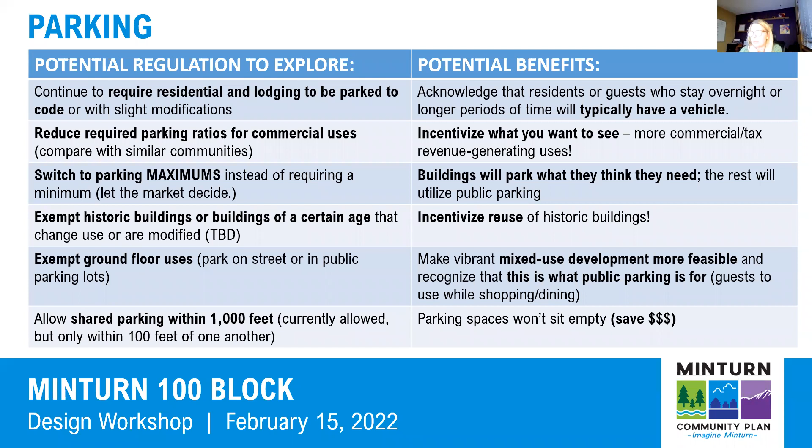So it looks like the majority of people, or well, not the majority of people. The winner or top listing was all of the above at 47%, with the second highest being exempt historic buildings at 31%, and then reduced commercial parking ratios at 14%. Great. Okay, so this is really helpful when we start to look at those parking requirements. Just a couple more slides here about other parking tools.

You may not think Minturn is there yet in terms of paid parking, but there's certainly peer communities, case studies. I just finished a downtown plan for Idaho Springs, who recently implemented a paid parking program, which has been really successful and helped them pay for a lot of improvements. Manitou Springs, Glenwood Springs is looking at one.

The benefit to managing parking with enforcing payment, and it can start very low, or it can also just be during certain times or days or seasons. It doesn't have to be all the time, but it's just something that we want to throw out as a tool to consider. Maybe you're not there yet, but just something to consider for the future.

What it does is it creates more turnover. People aren't inclined to park as long. They'll get their errands run and then leave and leave that parking space for someone else. And the other thing that's really important is that employees then do not take up parking spaces for paying customers.

If you're not there yet, something else to look at might be more just time restrictions and better enforcement. So expanding the area that is currently time restricted, and making sure that you enforce it to control for spillover and parking in neighborhoods. And again, that would create more turnover and not allow employees to take up those paying spaces. I'm going to go on to the next slide here.

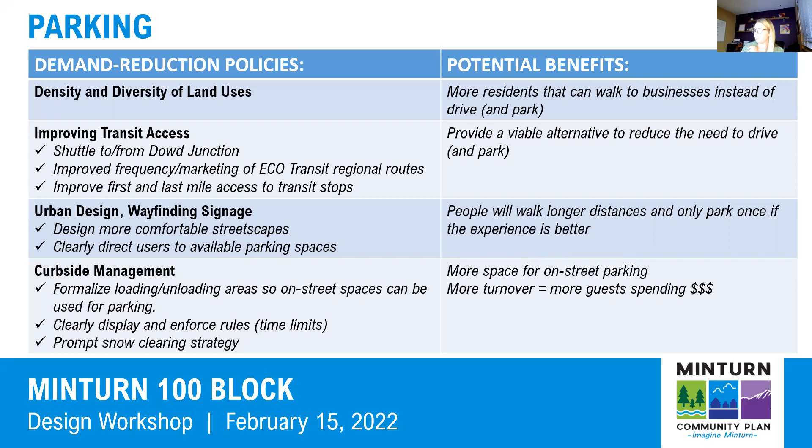So with that, I'm going to save the rest of the time here, about 15 minutes, for any questions or comments. It can be about parking or anything we've talked about today. We just wanted to provide this last few minutes for anyone to voice any concerns or ideas that you have.

Tom, Richie? Yeah, can you hear me? Yes. Okay, I'd like to call your attention to something I think is very misleading regarding parking. And that's when you said that it's one parking space for 6 seats. As an example, the Minturn Country Club has 150 seats. Our requirement is 28 parking spaces. You were basing it upon 50 square foot per seat.

And you also said that most restaurants, which I agree, are not more than 2,500 feet. However, us and the saloon are far greater than 2,500 square feet. And anyway, it used to be one parking place for 4 seats. And that was changed back in the late 80s, early 90s, with the advent of Suburbans, large vans. We then got taxi companies, and then later we got the ECO service. Now we have Uber and Lyft and all that stuff. So the parking requirements were lessened back in the 90s from 4 per seat to 6.

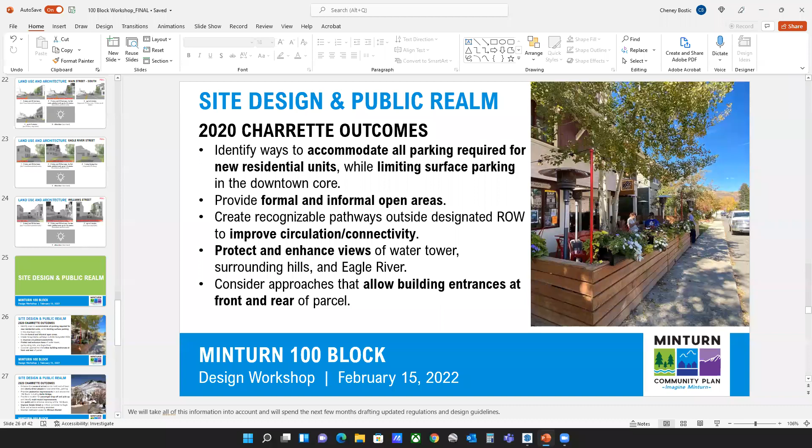I also just want to chime in and mention that Eagle County is working on a regional transportation authority, which would change up public transportation options within the county. So please, stay tuned into that conversation. I think it's going to be on the ballot this year, and that may change how transit service works in Minturn. So if you're interested in that conversation, please get involved.

Okay, the last person, Tom. Yeah, I'd like to thank Tom Sullivan and Larry Stone. Great comments. One thing I'd like to say about what Tom said, if a developer comes in and builds new retail space, new restaurant space, the rents will go up drastically. And I can tell you for a fact, most of us that are in downtown 100 block cannot afford Edwards rents, Avon type rents. I will bet money we would have nothing but a revolving door of retailers and restaurateurs.

That's one thing. Number two, I've seen on the question and answers written, everybody's bad mouthing Edwards. Well, Edwards is vibrant. I remember when Edwards was nothing but a pasture, and Edwards surpassed Minturn in retail and sales tax revenue. And our valley floor in Minturn is quite different. We all got to recognize that.

However, it's vibrant. And the only way you're going to get that is by going up so they can sell retail on the bottom and residential on top. To make the numbers work for any developer, that is going to happen. And if it doesn't happen, then Minturn will be the same way it is today, 10 years from now, 20 years from now.